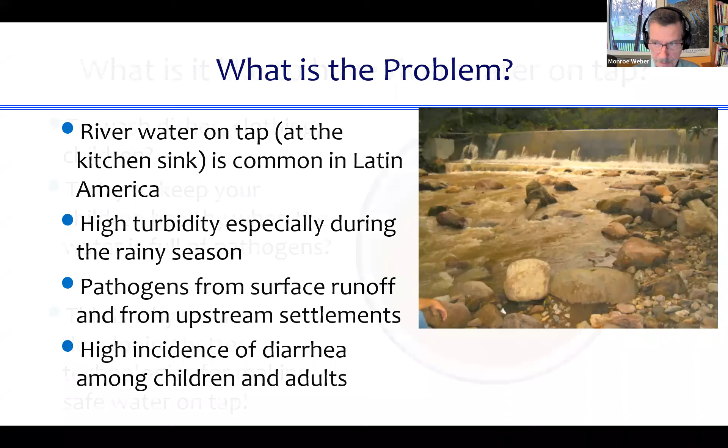And then we do this based on some empathy. We think about what it feels like, what it's like to live in a household where the only water coming into the house is river water, and what it's like to try to wash dishes and clothing and children and keep the children safe. I argue that you need to be a microbiologist and think about aseptic technique in order to think about how to keep your children safe when the water you're using in the household is very likely laden with pathogens. This is why we're working hard to develop better technologies for making safe water on tap more accessible to more people on the planet.

Okay, that was my pitch for the beginning.

I'm thinking now is the time I would love to hear from each of you a sentence or two of what's one thing you learned. You don't have to think of the most important thing or the one thing you're going to remember a decade from now, just one thing that you learned.

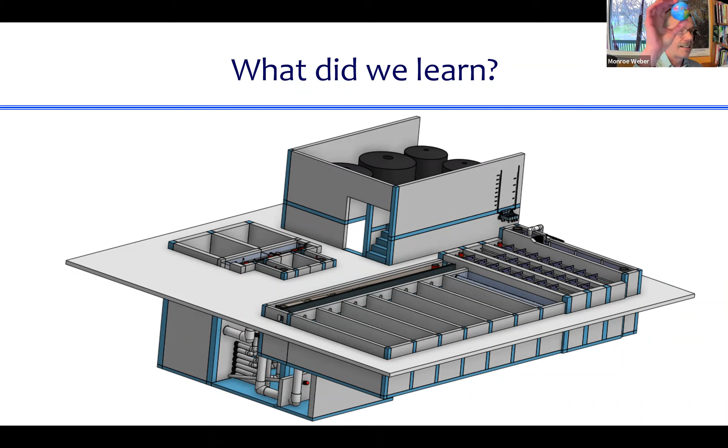What I don't know is how to go around in some relatively efficient way. I suppose I propose I will randomly call on one of you to start, and then each one of you, when you're done, names the next person. Okay, so it's like we're passing the talking stick around. I pass the talking stick, it's this planet Earth, I toss it to one of you, and then you toss it to the next person and give them the ball. So I would love to start with... oh my goodness, so many good people to ask, I don't know who to talk to. I will call on Katie.

There's a lot I learned, obviously. I would say the biggest thing I learned, or something I'm very conscious about, is that there's a lot of things we don't know about how filters work.

Okay, and I'll call on Tony. I learned what an LFOM is. I had no clue what the linear flow orifice meter was until this class, which was cool to learn.

I'll pass it to Ravi. One thing I guess I was most interested in learning was that flocs themselves can be filters. So that was something interesting to me.

I'll pass it off to Eric. I'd say the biggest thing that I learned, coming in with very limited knowledge, was how many systems work together to make a complete system and create the cleanest water possible, and how those systems can change just with something like higher flow or lower flow, how they can change an entire system, which was very informative and interesting.

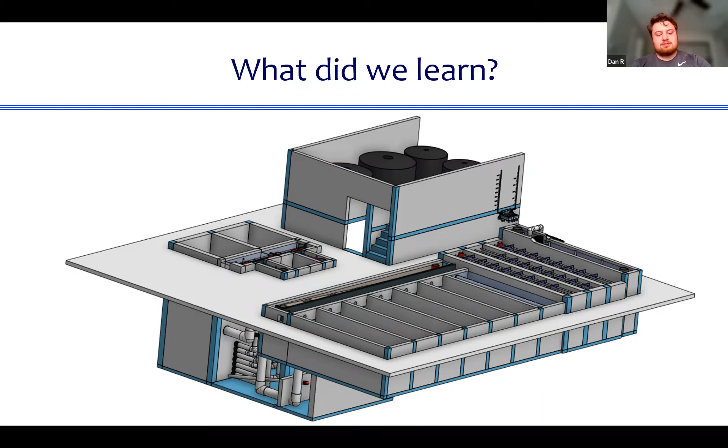Yeah, for me. Oh no, Michael. Hey, I think that every time.

But this time's mine. I think for me, I was scared going into this course, not knowing much about how the process works for clean water. Seeing how all the parts, all the systems go together and work, I feel like that was really fascinating to me, especially seeing that through the Onshape programs that we worked with.

And I will call on Isaac.

Yeah, I would say the biggest thing I learned was actually a relearn, because I took fluids during peak COVID when school was an interesting process or time in life. So I think relearning a lot of the basic concepts of fluids were really important going into post-graduation.

And I will throw it to Mr. Preston Newkirk.

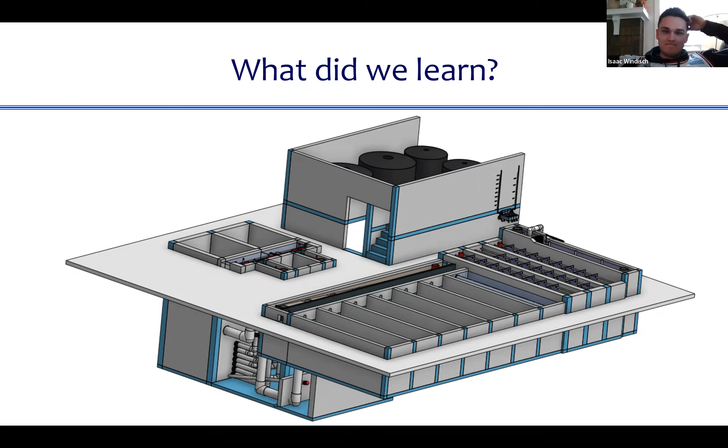Thanks, Isaac. I would say, piggyback off what he said, I really think this class kind of helped me visualize head losses, and I was able to incorporate that with a lot of my other coursework this semester, which was really great. And turbidity, high and low turbidity of water.

And I will pass it off to Brendan.

So one thing I learned was that water flows by piezometric head and not necessarily by elevation.

And I will pass it on to Victor.

I would say one of the biggest things I learned was about that stacked rapid sand filter. I think it's interesting that technology can be improved upon no matter what the case. I just feel like the standard in the US is just, that's what it is, and that's what we learn. But learning about different systems and how you can make your own system over time, that was interesting to me. I'll pass it to Finn.

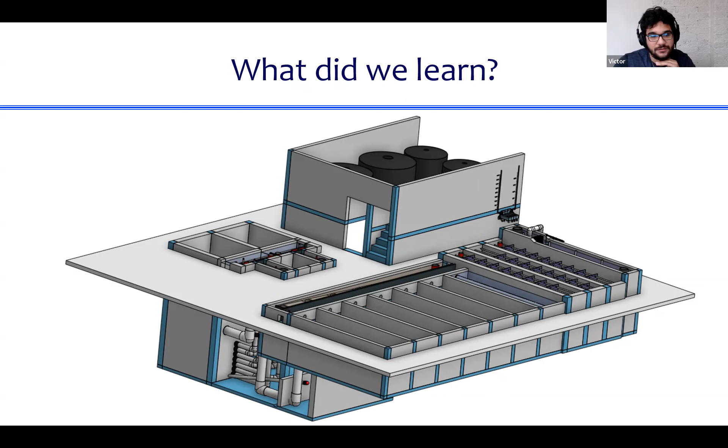I think the broadest takeaway for me, Dan and Mackenzie kind of already talked about this, but the fact that the majority of the cleaning of the water occurs way before filtration is something I didn't know before this class. But since that was already said, another big thing for me is the power of using programming and code to integrate with a 3D modeling environment, and how that can save you a lot of time when you're trying to model anything like the plant.

And who should we pass on to next? Sorry, I will pass it to Hannah.

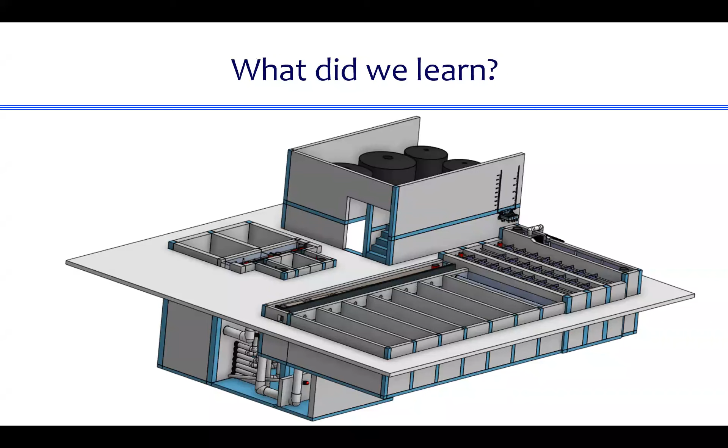I think one of my favorite things that I learned about was the flocculator and how flocs are formed, kind of piggybacking off of Ravi, and how fragile those can be compared to the velocity, and how easily they can just fall apart.

And I'll pass it off to Steph.

I was gonna mention, like Victor said, the stacked filter. I had no idea that sand could be used at this capacity, so I think that was something really cool to learn for myself.

And I'll pass it off to, I don't know who hasn't gone yet. Jin Yao. Maybe not there, or so did we get all the students now?

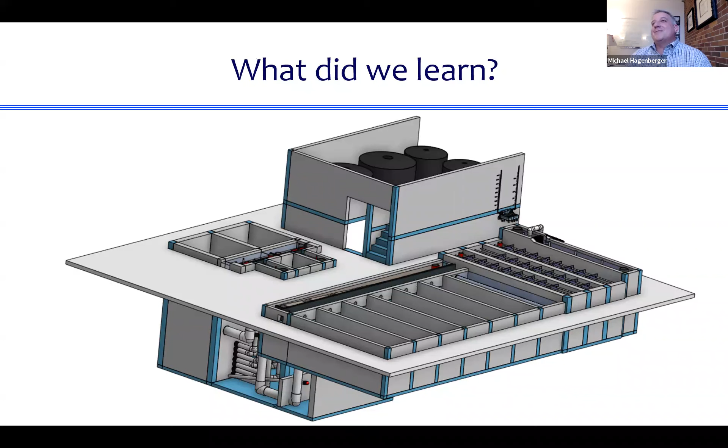Thanks, Michael. Patrick? I think a few things come to mind. One, having seen the diagrams of these plants for so long, finally being able to make one and look at one in Onshape and move it around and really get how all the pieces fit together, that was pretty exciting for me. And then also, I've always been very impressed with the plant, but I think now I'm even more impressed with the amount of thought, building on what Michael said, of the intricacies of this design. I realized I thought I knew how it worked, and I did not. Now I maybe sort of understand how it works, but I feel I'm still learning too.

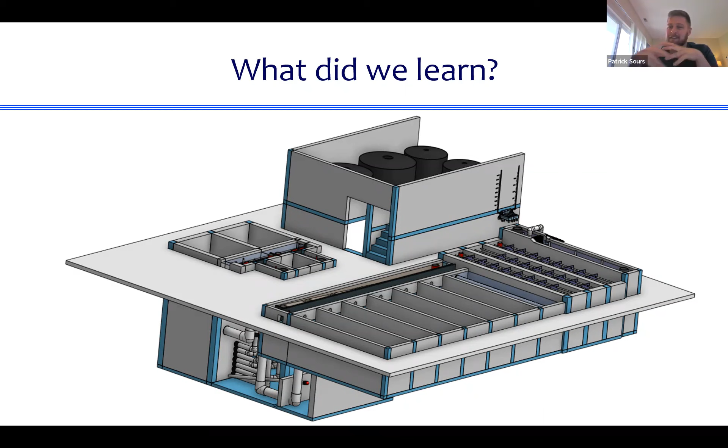Wow, so thank you all. Thank you so much for sharing those learnings. It was really fun for me to hear them, and I'm hoping it was enjoyable for all of you.

This makes this insight, okay, Patrick and Michael have been very kind in talking about how smart the design of the AguaClara plant is. And I want to credit some of that with the fact that I've been teaching a course every year for like 17 years, describing what we knew about the design. One of the things that I learned again in teaching this course, which I hadn't done for several years, is that every time I teach the course, I'm forced to try a little bit harder to make things a little bit clearer and make sure that I capture the latest things we've learned and include them in the lecture. That evolution is both good for teaching, and it's also good for the design.

And maybe that's one of the reasons why designs have not continued to evolve as fast as they should have in the standard approach to designing water treatment plants — because the folks who have been designing those water treatment plants haven't been teaching a course about the underlying physics of their design. Maybe if that had happened, they would have continued working on improving them. Anyway, that's something just to think about.

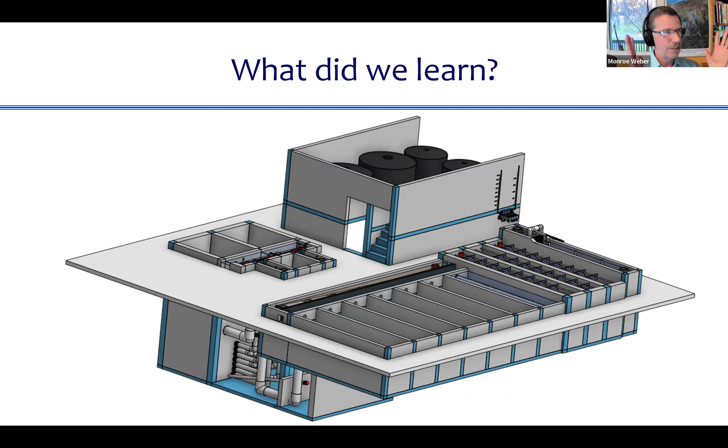Okay, I've got a few minutes, and I have some slides that I put together that I want to go through. So let's go on a trip, okay? Thank you for answering what did we learn. I'll do my take on a real quick review, because you don't get an exam, so you've got to at least do a review.

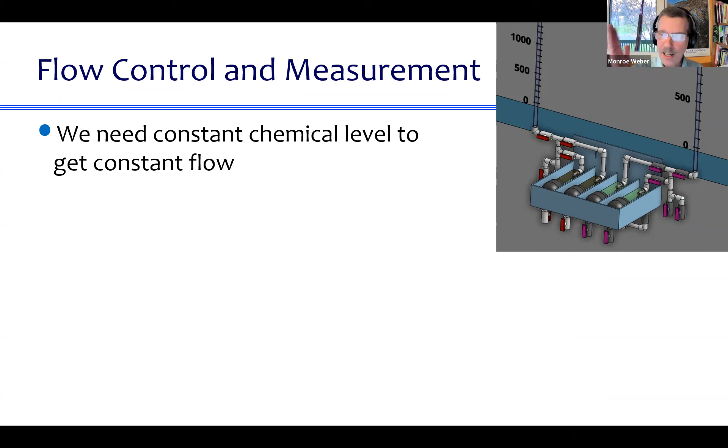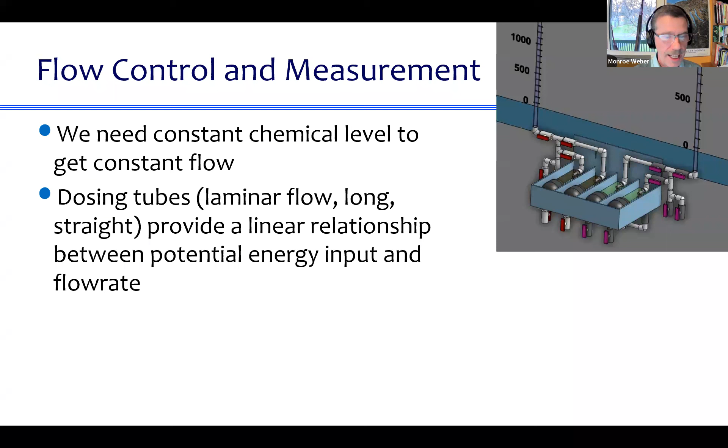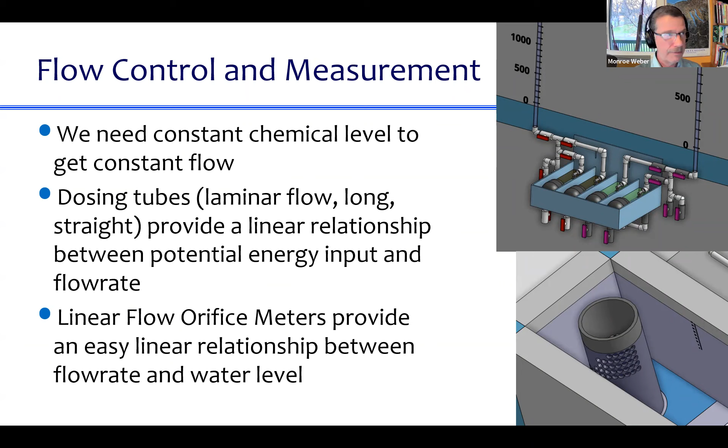So we did flow control and measure. We realized that we need constant chemical level in order to get constant chemical flow, and we know that in the stock tanks, the level is changing over time as the stock tanks empty. So we use a very simple device, a float valve, to get that constant level. We use dosing tubes to turn that constant level into a constant flow rate. Those dosing tubes use laminar flow and a long, straight, small diameter tube, and that gets us a linear relationship between an elevation change and that flow rate. Then we use the linear flow orifice meter — was it Tony that mentioned this? — and that provides the easy linear relationship between flow rate and water level going through the plant.

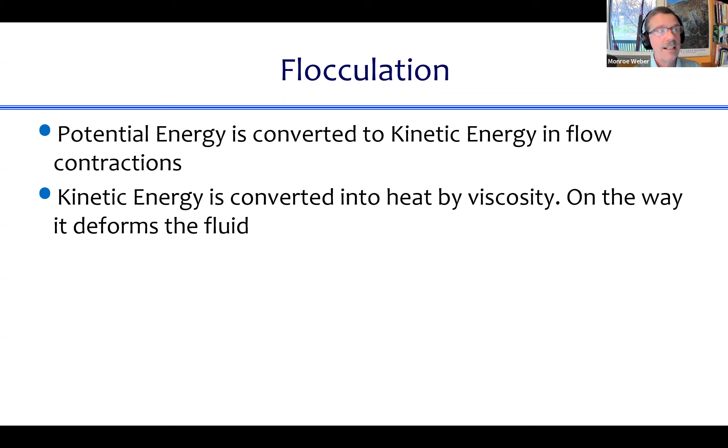And then flocculation. This is a place where there are all these energy conversions, and ultimately that energy conversion does something we need, which is collisions between particles. It starts with a potential energy difference across the flocculator. That potential energy is converted into kinetic energy through flow contractions in the flocculator, and then that kinetic energy is converted into heat. The way it does that is through viscosity, and the way viscosity does that is by deforming the fluid. It's that fluid deformation that ends up dragging the particles with it, and that fluid deformation causes collisions between particles, which is what we actually wanted. So there's this long story of energy transfer, but the bottom line is, in the end, the water deforms, that causes particle collisions, and that's what we need so that particles can grow.

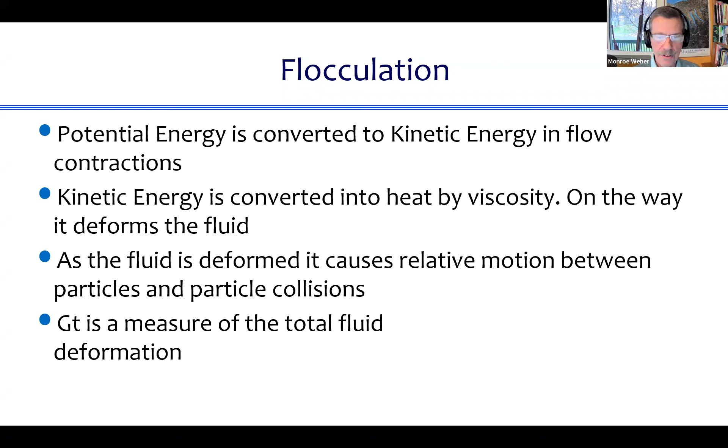And then GT is kind of a measure of the total fluid deformation that happens in a flocculator. So you know that you need lots of fluid deformation, so you need a high value of GT to get lots of collisions. And then you now know the equations for designing the flow dimensions to get a target velocity gradient, and you know how to figure out how many contractions or expansions you need in order to get the total GT in order to get your desired treatment.

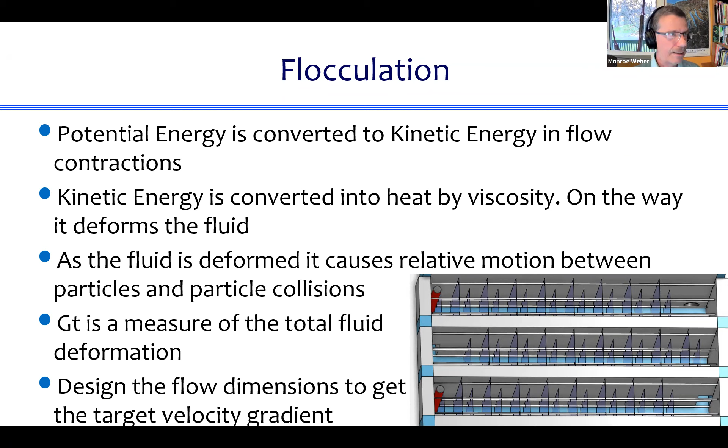Clarification: we use diffusers and a jet reverser to keep the floc filter fluidized. You saw a fluidized bed of sand on Tuesday. There's also a fluidized bed of flocs, which we call the floc filter. They're not nearly as dense as sand grains, so it's much more gentle, but it's the same idea.

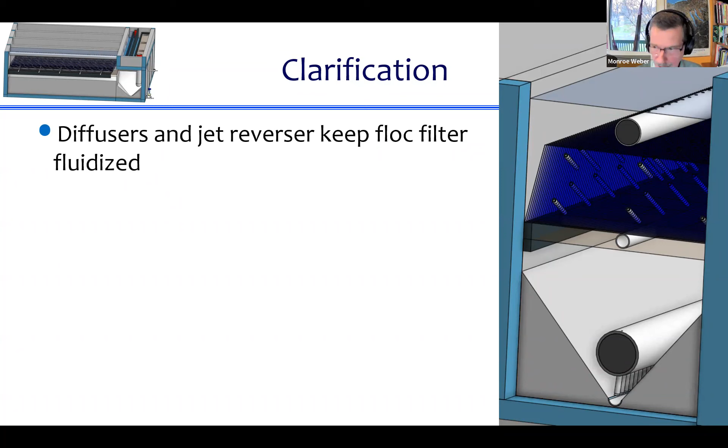Just like the sand had a clear interface between the fluidized bed and the water above it, the floc filter has a very similar thing, where there's lots of flocs and then all of a sudden it's almost clean water above. Those flocs in the floc filter capture small particles that failed to flocculate.

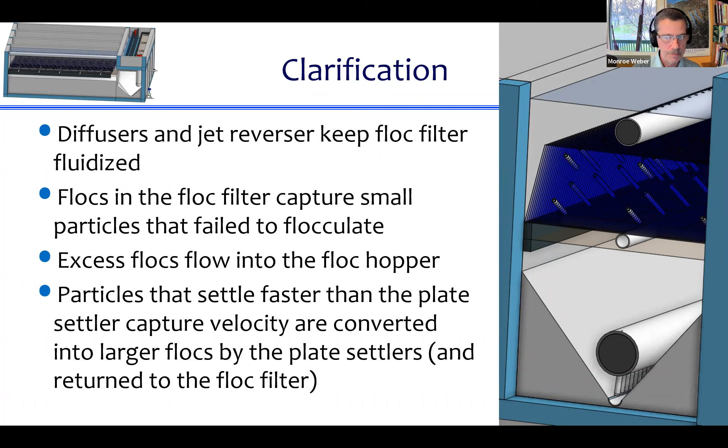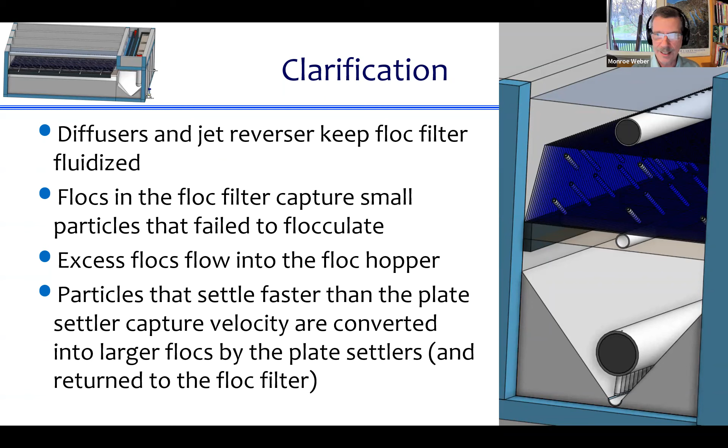Excess flocs flow into the floc hopper, and particles that settle faster than the plate settler capture velocity are converted into larger flocs by the plate settlers, then return to the floc filter. So there's this lovely dance of particles happening within the clarifier.

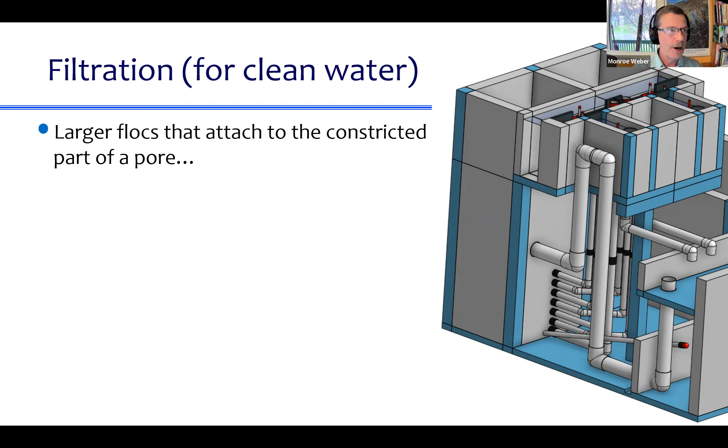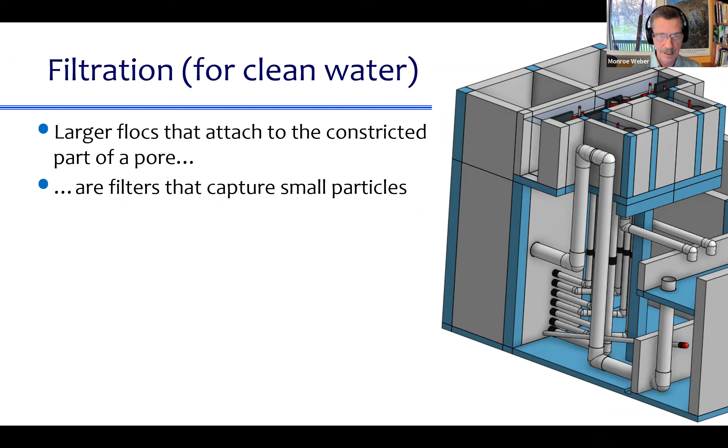Then there's a filter, which you can use if you have clean water. Larger flocs that attach to the constricted part of a pore formed by sand grains end up being filters that capture small particles. So even within the sand filter, flocs end up playing a key role as floc filters. The flocs have a finite capacity to capture small particles, and constrictions don't clog.

They just reach a stable minimum diameter where the shear exceeds the coagulant bond strength, and then flocs that come in blast right through those pores and continue deeper into the filter. Eventually that active zone in the filter, where flocs and other particles are being removed, slowly migrates down. Eventually it comes out the bottom, and at that time you see extra particles coming out, which we call breakthrough, and the filter performance worsens.

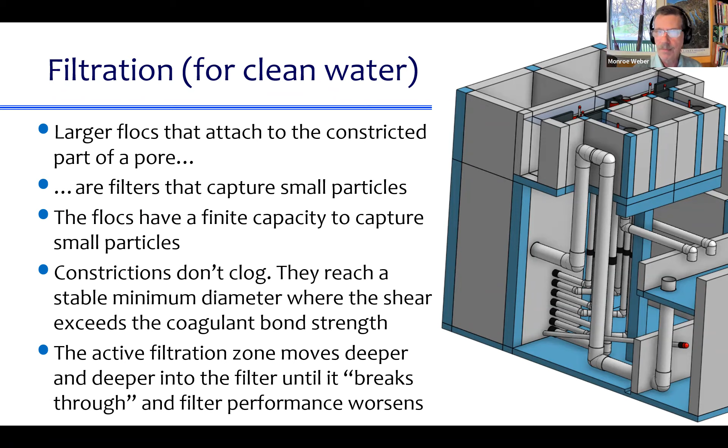Okay, so that was the whole course, just like that, boom.

Now let's zoom out one step. There's a plan, but we're going to zoom out and think about some other things that happen in this class. We learned about— wait, we can't see your screen. How long has it been like that? The whole time, but you explained it all so I assume everyone knew what you were talking about, but when you indicated 'now we zoomed out,' that's fascinating—it says I'm screen sharing. I can see the screen. Well, now I can't, but I could before. Okay, might just be me then. I feel better because I was getting the right— okay, so we're all back online?

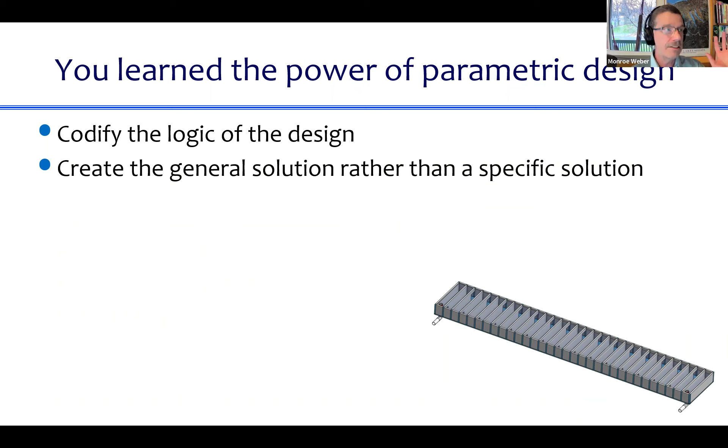So, the power of parametric design: you learn to codify the logic of the design, creating a general solution rather than a specific solution. In each of your design challenges, you had an option of changing a flow rate at the end of your design, and you would get different answers calculated automatically, another viable solution. It's as if you did the general solution for that design challenge.

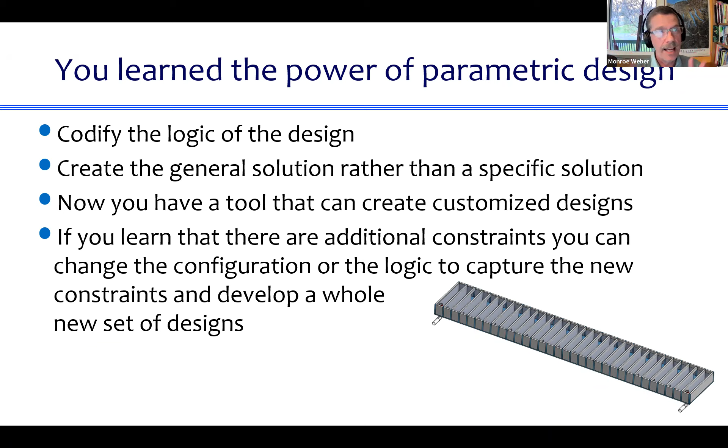Once you've done that, you have a tool that can create customized designs. And if you learn there are additional constraints you missed in your first design, you can change the configuration, edit the logic to capture the new constraints, and all of a sudden you'll have a new whole set of designs. This is the power that Agua Clara is really enjoying. We have all these designs, we have the code to create them, and as we learn new things, we can very quickly modify that code and put that right into the designs being built.

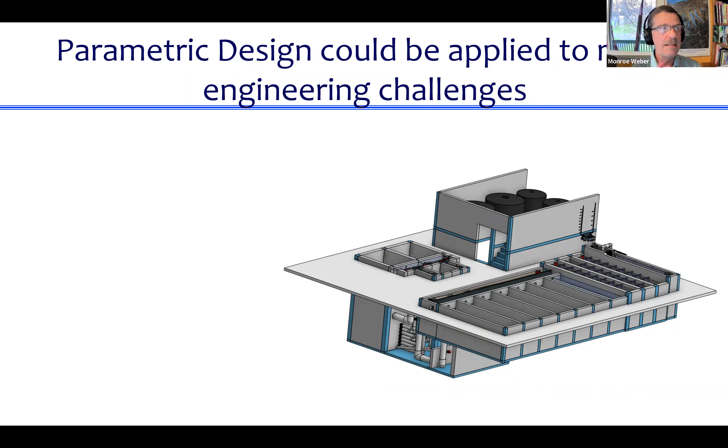I want to make it very clear that parametric design is not something that only makes sense for Agua Clara plants. No, this is a tool that can be used in many, many places—whether you're thinking about wastewater treatment plant design, bridge design, home design, designing solar farms, or designing windmills. Wherever you want to go, if you're designing something, the idea of creating a parametric design to solve the problem would be very, very powerful.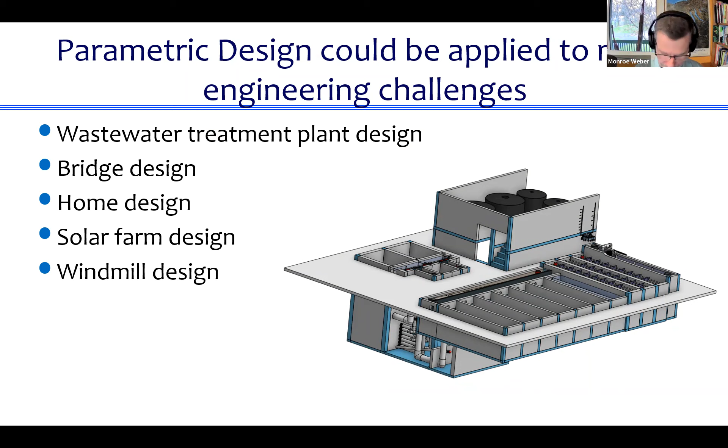Another thing we've been reflecting on is that the edge of knowledge is very near. As humans, we have major gaps in our knowledge. There are many things we don't know. The way I like to think about it is that of all the things one could possibly know, each of us knows just a tiny, tiny little bit. So the vast majority of things, I know nothing about.

I know a little bit about drinking water treatment, and the little bit that I know makes me realize there's much, much more about drinking water treatment that I don't know yet. So holding that as both a bit of humility and the power of there's so much more to learn. And if we do learn more, we can do even more things.

This is a quote from our textbook: we want to encourage skepticism, and we want to develop insights to guide thoughtful skepticism. A key skill for successful engineering is the ability to identify the location of the edge of knowledge. It's much more powerful to know where the edge is than to just be overly confident and not aware that we're in territory where we don't know what's going on.

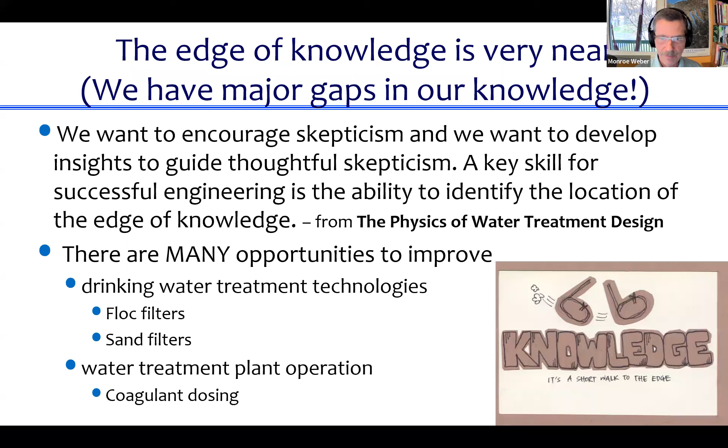There are so many opportunities to continue to improve drinking water treatment technologies. I made it very clear that we don't fully understand what's going on in the floc filter, and I'd argue no one has ever really figured out how to optimize operation of a floc filter. Sand filters, same thing - we've been using sand filters for 100 years, but we don't really understand all that's going on inside them. Because of that, we don't have equations that describe how we would design them and make them better. And indeed, the stacked rapid sand filter opens up a whole new opportunity for thinking about filters in a new way, and very clearly we have not optimized that.

A whole other domain is thinking about plant operation. We're currently embarking on this path of figuring out how we might start providing good feedback to plant operators about what they should do with coagulant dosing. That's been a dream for very, very many decades. My suspicion is that there's at least a good chance that we can crack that one, because we finally have better insights as to what's going on inside the plant and what role the coagulant is playing.

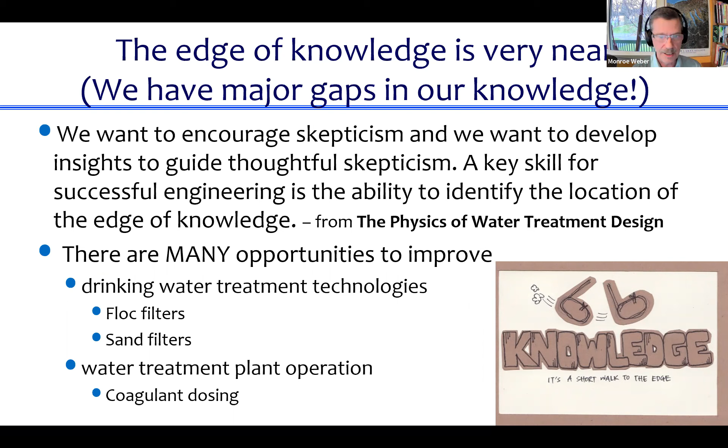If that wasn't maybe a bit of a surprise, if you were in a conventional water treatment course, you would have learned a completely different explanation for how coagulants work. So what we learned here about coagulant nanoparticles is based on our research, laboratory research, papers we published, and being the first ones to develop a model describing flocculation using equations. And we use a scientific method to test hypotheses.

I just had this fun conversation with Minty Nuñez, who's an engineer working with Agua para el Pueblo in Honduras. She sent me a WhatsApp message and said, should we assemble one of the clarifier manifolds without tapering the diffusers? Remember those tapered diffusers? So when we're making this next plant, should we have one of the clarifiers not have tapered diffusers to see how it works? Of course my answer was yes, let's do the experiment. It's relatively low cost and relatively low risk, and so we'll learn if the tapering is necessary or not, and whether it's actually better without the tapering.

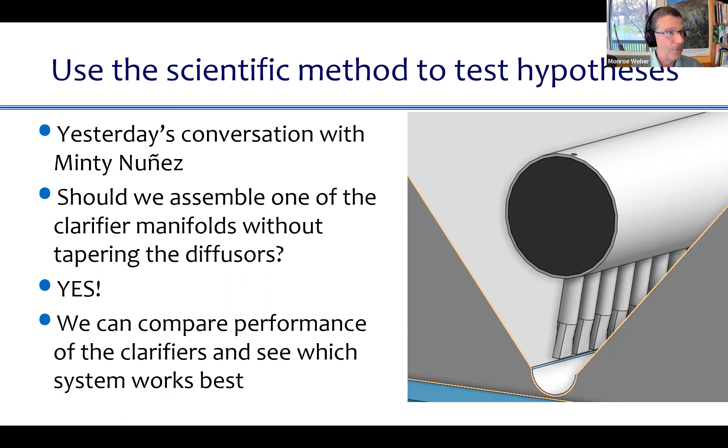So we will continue to learn. Stay tuned. And here's another insight: useful technology is, in many circles, an undervalued factor. I visited a lot of water treatment plants in many different countries, and it became clear from my visits that technology failures are common, and that technology is a major reason why water systems aren't working well.

One of the current stories about why water quality isn't good when it arrives at the tap in households is that the water is contaminated by the distribution system because the pipes are old. It's possible that that is right, but I turn on my skepticism and say, given what I've seen in many countries and many water treatment plants, I suspect it's much more likely that the reason water often doesn't come out of the tap safe is because the water treatment plants aren't working well. And that requires a very different solution.

So be skeptical. I don't know - I'm just skeptical. I don't actually know what's causing the problem, and you'd have to check on a site-by-site basis. But just because people with confidence talk about distribution systems causing water quality failure, doesn't mean we should believe it, because we also have firsthand evidence that water treatment plants aren't doing what they're supposed to be doing.

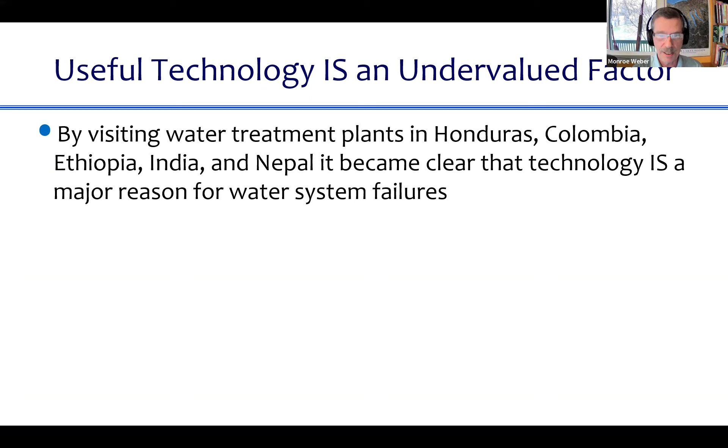And then this other insight: good technologies are worth money, and they make the whole system more sustainable. So people are willing to pay more for quality services that they value. No one likes to pay for dirty water on tap. People are willing to pay more for safe water on tap.

And if the incremental value that people place on having clean water exceeds the incremental cost of providing safe water, then making that change will actually make the entire system more sustainable, because there will be more revenues now than there were before. We've seen this in communities in Honduras, and I suspect this is something that could be replicated in many, many places.

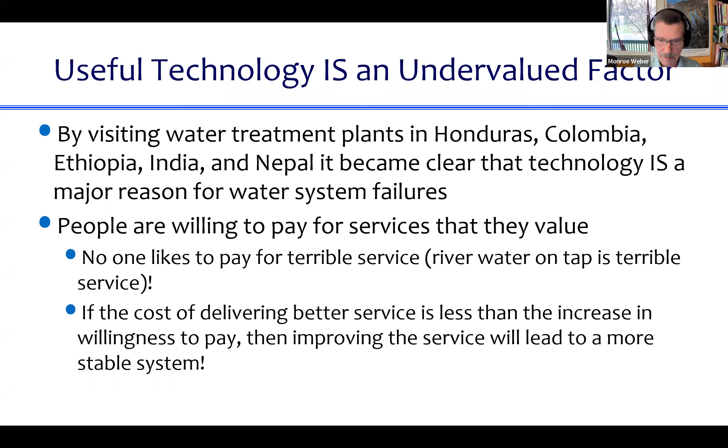There's one equation for today's talk, and that is 1 times 1 times 1 times 1 times 1 times 0 is 0. This equation captures the idea that in order for a system, infrastructure for a community to be successful, all these things have to work.

There has to be an energy source, assuming it needs some sort of energy. It needs to have some education in the community about what this system is and why it matters, and why they should help pay for it. There needs to be money to pay for it. There needs to be some form of governance, both local and a supporting national governance structure that makes it possible for this infrastructure to work.

There needs to be a pool of labor, people who are able to do the work needed to maintain the system. And of course there needs to be money, mentioned earlier, to pay them. There needs to be some technology, the infrastructure you're going to provide. And if any one of those factors is a 0, the system isn't going to work.

And of course, if technology is a 0, it's not going to work.

As an engineer, the cool thing I think about is: I'm not wealthy. I can't pull a Gates thing and independently fund providing safe water to lots of people. But if I can use my brain and engineering and my ability to generate community to create better technologies so that communities can use this new technology and pay less money than they would have for previous options, then it's as if I had generated that capital, right?

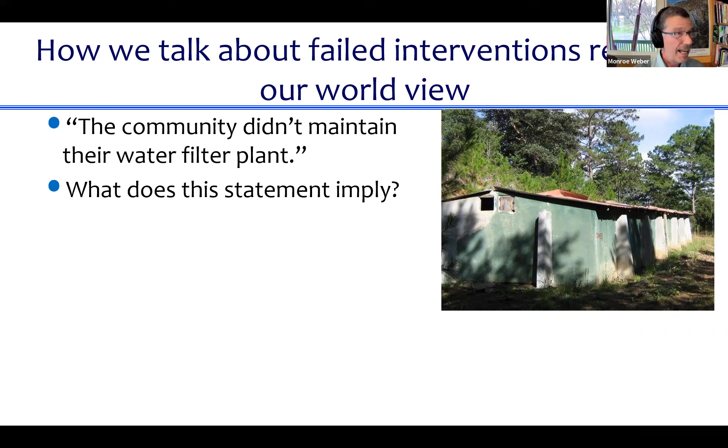Here's a water treatment system where the characterization was that the community didn't maintain their water filter plant. But that implies there was something the community didn't do that they should have done. It implies maybe the community didn't make a rational decision, that maybe they should have maintained the system, but they didn't.

So here are some reflections about why this community might not have maintained their water filtration system, their water treatment plant. Maybe the community didn't value clean water, or maybe there wasn't a mechanism in place to fund operation and maintenance, and so we got a 0 on that one. Or maybe it was just too expensive to operate, or too hard to clean the filter, or maybe it takes too much water to clean the filters, or maybe they were never trained how to do it. Or maybe the filter didn't clean the water.

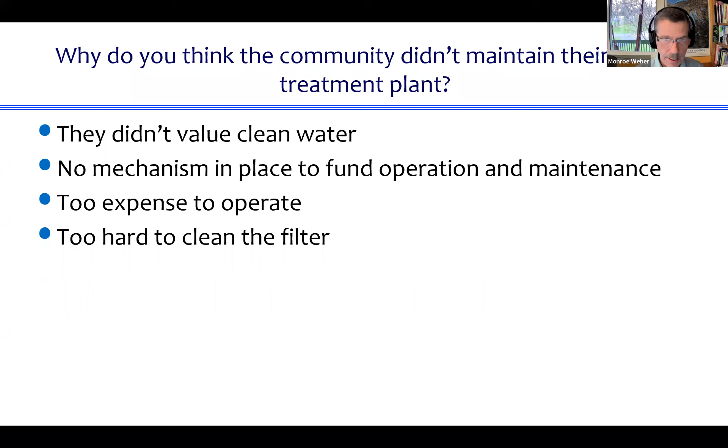In that particular case, where there was a water treatment plant built for a town in Honduras, the system could not have made any significant improvement to water quality because they weren't using a coagulant, they only had a filter, and they were treating really, really dirty water. So it could not possibly have worked. And yet, in telling the story about that system being abandoned, people didn't talk about it being a technological failure, and it was. Instead, they talked about the community not maintaining their water treatment plant.

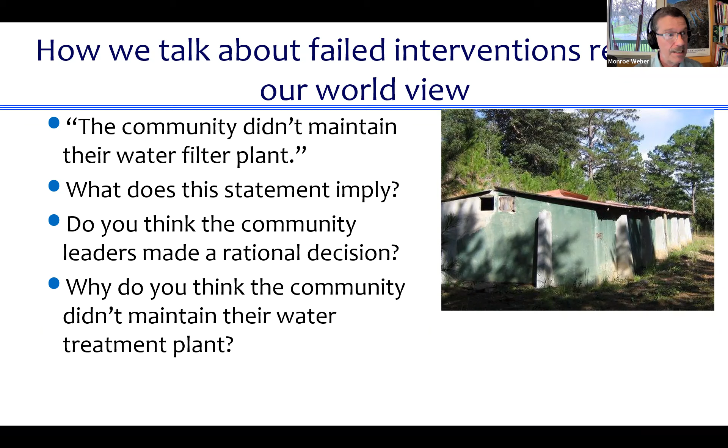So it would have been much, much better for the engineers to say, you know what, that was an engineering failure because the technology didn't actually work in that context.

Okay, now the US water infrastructure. Some of you are graduating shortly, some next year, and you're getting grades better than this, right? The American Society of Civil Engineers drinking water grade for US water infrastructure is C-. You can go check it out at their website.

What you've learned in this course is completely applicable to designing new and upgrading existing water treatment infrastructure anywhere on this planet. It's the same physics no matter where you are. Granted, you will be pushed to do more conventional designs that don't work as well here in the US, but now you know some of the underlying physics of what's going on inside water treatment. So you are positioned very well to work on any of this design work. You have the latest insights into the core water treatment processes, and this is the only course on the planet that teaches these ideas. So you have a competitive advantage. And by the way, employers like consulting firms love having students come out with this background.

Resilient designs are needed in the United States too. Fewer interdependent systems are better.

So real quickly, a story from New York City. I know this was a long time ago - not before I was born, but a long time ago. In 1977, there was a blackout. All of New York City lost power. One of the engineering insights from that event was that there were gas-fired turbines that could generate electricity and be brought onto the grid very quickly to provide power. New York City should have been able to use those to get started again after they lost power.

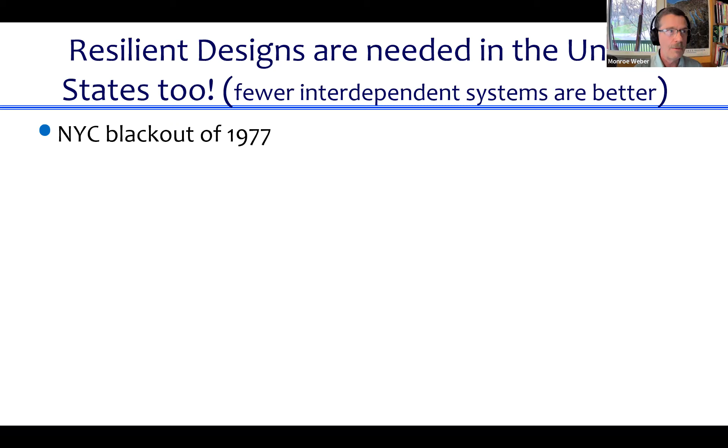But there was a problem. Those turbines needed lubrication for their bearings, and they had an oil pump to circulate oil that needed to be running before the turbine started. That oil pump was driven by an electric motor. So they couldn't start those turbines with the grid down. Just think about this - it's a great insight for engineers. Think about startup and shutdown. It's very easy to continue along when everything is working well, but think about what it's like during startup, shutdown, and extreme conditions.

Here's another one, Boeing MAX 8. It hasn't been in the news lately because of the pandemic and other things, but it was a big thing just a few years ago. The reason MAX 8 failed is because they substituted a stable aeronautic design and instead used software and feedback to control the plane. Previously, planes were designed so the engines were located in a place where the engine could thrust really hard without creating any unstable forces on the plane. Boeing MAX 8 violated that rule and tried to compensate using software, and that's what led to those failures.

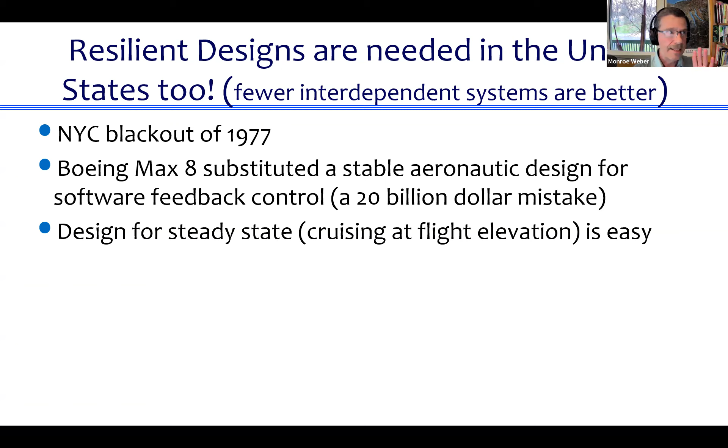And I love using computers. I love using computer control. But I think we need to be smarter about how we're doing that. I think we should think about... using computers to manipulate valves to set flows using feedback control results in poor performance in many modern drinking water treatment plants. This is a big issue, and there are many plants that previously had nice hydraulic controls.

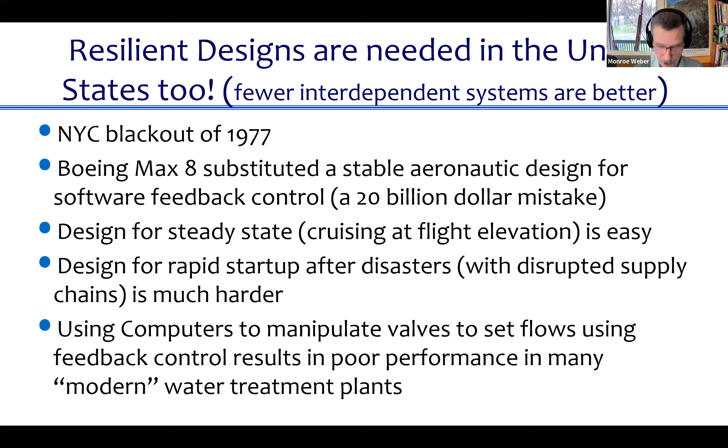Think about how Agua Clara runs water through a plant. Those plants had hydraulic controls, and they switched to get rid of the weirs, get rid of the elevation controls, and instead stuck in a mechanized valve and used a computer to control how much that valve is opened, having that valve control the flow rate. Those systems, theoretically, could work, but the feedback control ends up causing flow oscillations. Just two days ago, I was looking at flow control through a municipal water treatment plant filter and seeing the filter flow rate doing this, just up and down, up and down, because of bad computer control.

So there's a good argument for using the hydraulic control system that Agua Clara is using, and then putting smart computer controls on top of that, but leaving the core operation to the more simple hydraulics to make sure the plant does what it's supposed to be doing. Computerized controls require experts to tune the algorithm and maintain the hardware and software, whereas hydraulic controls can be easily designed to reliably accomplish those same goals - set it and forget it - and the same plant operators working in the plant can easily understand, operate, and fix as needed those reliable hydraulic systems.

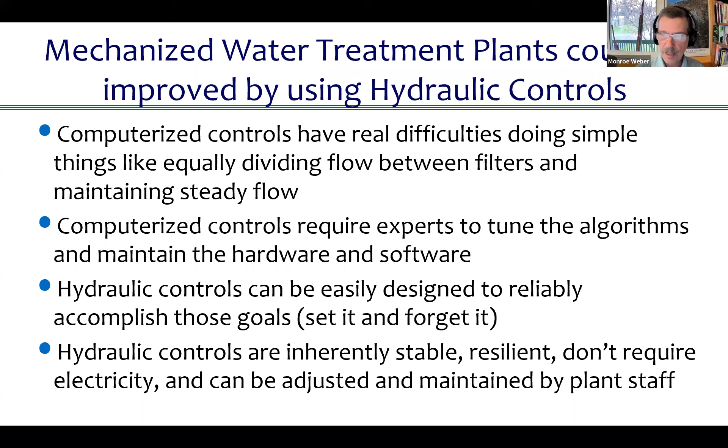And then this is just a word from the folks in Honduras, granted it's from 2019. There was a rural water workshop. The Agua Para El Pueblo engineer Santiago Garcia gave a presentation about Agua Clara technology, and they went and visited a plant. Pedro Ortiz, who is the Honduran government water ministry's top water engineer, stated that the only group in Latin America investigating low-cost water treatment is Agua Clara. He called it la mejor en el mundo - the best in the world.

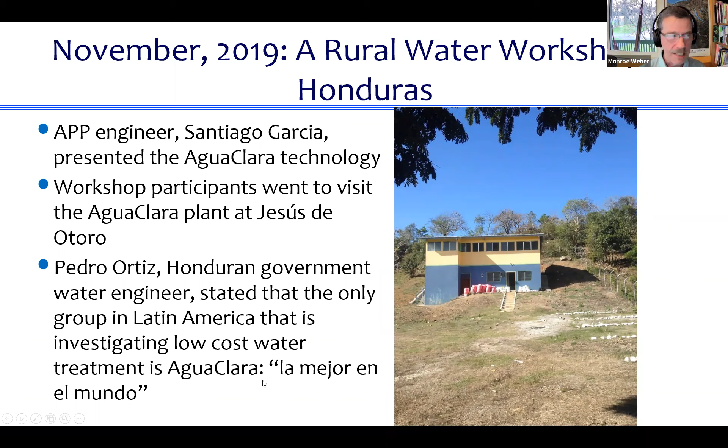Just a couple more things. I want to think about how you can connect meaning to graduate school and professional careers, because some of you are moving on in a few weeks. So for those of you who are thinking about graduate school, and when you're connecting to graduate programs, think about what kinds of research you're getting into.

There are 4 steps that are often used during graduate study. One is measure stuff, and there are PhD programs where you can measure stuff, and that's all you need to do to get a PhD. The next level is to create models of how our universe works based on those measurements. That's fundamental science, one big step up from just measuring stuff.

Take it another step. You could take those new understandings of how the universe works and invent new solutions. That's another big step up, inventing based on how the universe works. Then as another step, you could take those inventions and engage with the world to implement those solutions. That's engineering. So you can measure stuff, figure out how the universe works, invent new solutions, and then implement those solutions to make the world a better place. That's kind of the steps towards seeing engineering as the culmination. Engineering is the last step.

And I want to end with one more thing. Happiness is safe water on tap, and engineering is love. So engineering is love is making this connection that engineering makes it possible for people to live and thrive in communities. The only way you can have a city where people are healthy is if there's lots of engineered infrastructure that helps support that. So the engineering that's required to help those communities thrive is about love, because helping others to thrive is the definition of love. So designing and building the infrastructure that makes it possible for communities to thrive is love.